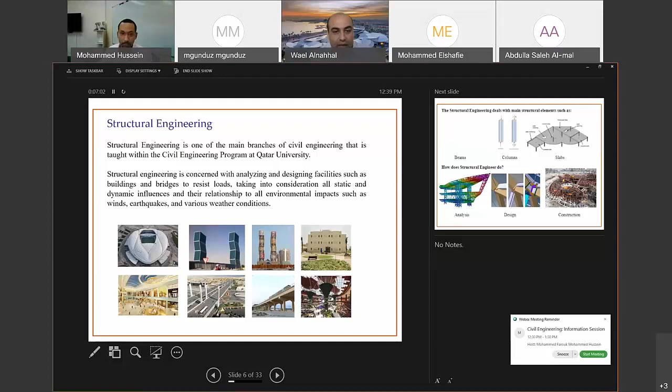So for structural engineers, you are going to deal mainly with different structural elements. We are talking about beams, columns, slabs, trusses. At the early stage, after graduation, you will mainly be responsible for the design of individual elements. After that, when you are a more experienced engineer, you will maybe be responsible for the structural design and the integrity of the whole system.

So what does a structural engineer do? We first do the design. In order to do a proper design, first of all, we need to do a proper analysis. And then after completing the design, the next stage is to make sure that our design will be constructed in a proper way.

If we talk about the major employers for structural engineers, and you look around you here in Qatar, you will find many opportunities for structural engineers. We're talking about engineering consultancies, local authorities like Ashghal, the oil and gas companies, the Ministry of Municipality and Environment, Qatar Rail, and engineering contractors as well. When you gain experience, you even have the opportunity to start your own company.

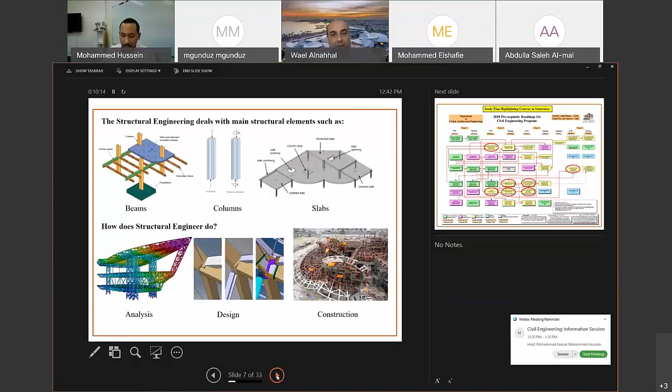As a structural engineer, you can work on site, or you can work in an office as a consultant. You can do the drawings themselves. You can be responsible for checking the drawings. You can make sure on site that all the structural drawings are implemented in an efficient way. So there are really many opportunities for you as a structural engineer.

Dr. Muhammad, next slide, please.

Okay, so as I mentioned before, in our study plan you will find about 5 to 6 courses related to structural engineering. We start with engineering statics to learn the fundamentals of equilibrium, types of forces, and how to deal with forces in 2D and 3D. After having the fundamentals, we move to strength of materials and how to do the proper analysis for structures.

The next stage is how to do a proper design. Here in our Department of Civil Engineering, we are talking mainly about steel structures and concrete structures. But if you need to design other types of structures, it's the same concept. So you will be equipped to do the design regardless of the material you use. Of course, I have to emphasize that we also have 2 elective courses you can pick related to structural engineering.

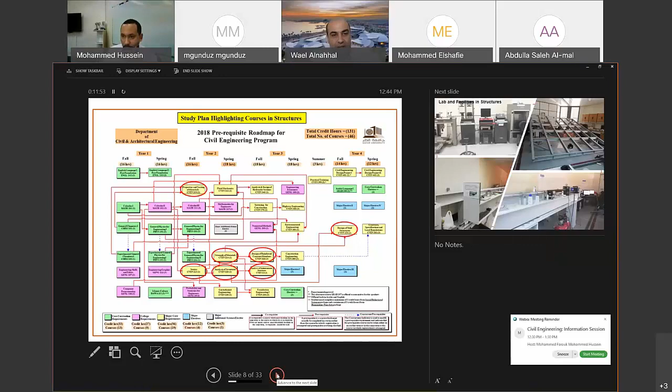Next slide, please. We have at the Department of Civil Engineering the facilities to run different tests related to structural engineering on both the undergraduate and graduate levels. At the undergraduate level, we have our structural lab where we can do different mechanical testing for concrete and steel, related to tensile capacity and compression capacity. At the graduate level, if you look at the pictures on this slide, there are many structural engineering projects we are working on right now with students in their master's and PhD programs.

And I believe we also have a structural lab in the engineering workshop where we can test beams and slabs as well.

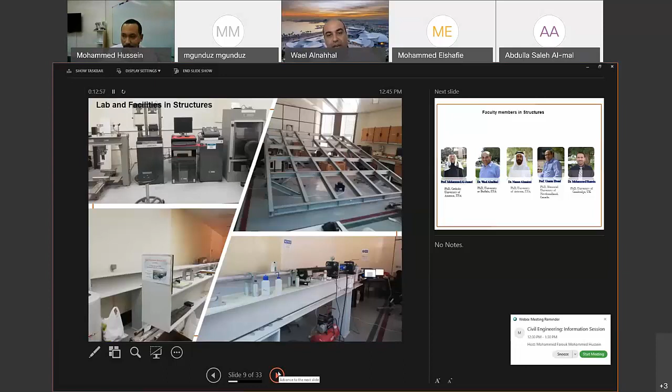I want to emphasize one more thing before ending my presentation. For us as structural engineers, it's really very interesting that you can see your ideas become reality. To be honest with you, from my experience, there's nothing quite like seeing a project that you designed or worked on at the site become part of the world around you.

And this project will stay for sometimes like 50 years. For example, imagine yourself working on the Qatar Rail project. This project will stay for 100 years, and I'm pretty sure you're going to be proud that you are part of such a project. So always think about that.

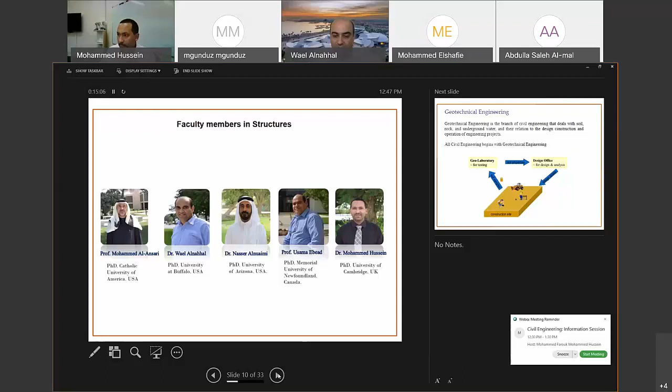Assalamu alaikum. My name is Mohammed Elshafie. I'm a geotechnical engineer. I'm also an associate professor here at the Department of Civil and Architectural Engineering. There has never been a more exciting time than being a civil engineer. If you're in any doubt, just look around you here in Doha. It's like a huge construction site, huge amount of activity everywhere. Equally, there has never been a more exciting time than being a geotechnical engineer.

Now, geotechnical engineering is the part of engineering that deals with the ground. Any structure that is going to be built anywhere in the world eventually needs to have its foundations on the ground or in the ground, and this is what we try to understand through geotechnical engineering. So what do we do? We take samples from the ground, test these samples in the lab, we try to understand them very well, and then we can do some calculations to make sure that whatever we want to build can stand up and stay there for many, many years.

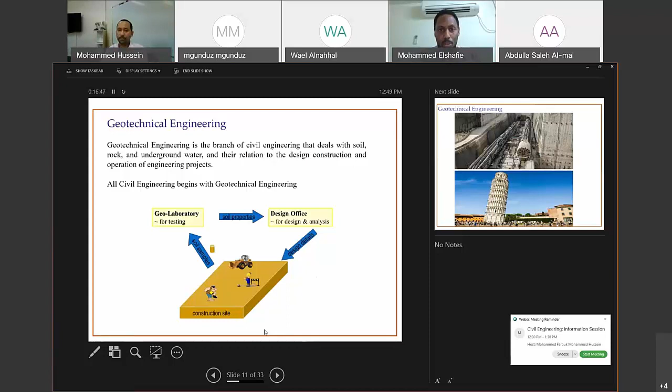In a way, we are like doctors. When doctors want to check the human body, what do they do? They have small syringes, they take some blood from you, they go and test that blood, and they come and tell you stories about what is happening inside. This is exactly what we do, but we do it with the soil, with the ground.

Next slide. Now, once you've understood what you are dealing with in terms of the ground underneath your feet, you can do all sorts of exciting structures. You can see the picture at the top. This is part of the Doha Metro, part of Qatar Rail. What you are seeing is a huge machine, like a small mole that goes into the ground and digs that hole so that the tunnels can then run through it.

The picture underneath is the Leaning Tower of Pisa. If it wasn't for geotechnical engineers, monuments like this would not be able to stand up for many, many years. It was about to fall. By understanding the ground underneath that structure, geotechnical engineers eventually managed to stop it from moving and save it so that everyone can enjoy it for many years to come. Go to the next slide.

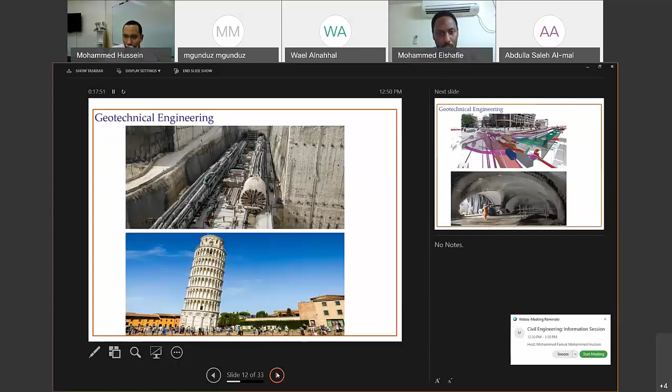Doha has just started putting in metro tunnels under the ground. It's only going to continue. Once you start digging into the ground, it is never going to stop, because more and more people come and live in cities. The population expands. They want to travel more. There is no space above the ground, so the only solution is to go under the ground. And it can get very congested very quickly.

The picture that you see at the top is a computer model from London. If you look underneath your feet, it can get really complicated. But as geotechnical engineers, we have all the technology to deal with that. We make sure that these do not clash with each other. It's all very high tech. You actually simulate all that in a computer.

Once you've done all the simulations and calculations, you can translate that into the picture that you see underneath. What you see is someone with a small joystick, just like what you use for your PlayStation, controlling the concrete and how it is spread onto the soil so that you can create these beautiful cavities for tunnels eventually to run through. So if you decide to become a civil engineer, and within civil engineering to study geotechnical engineering, you will have the ability to do all of this. Next slide.

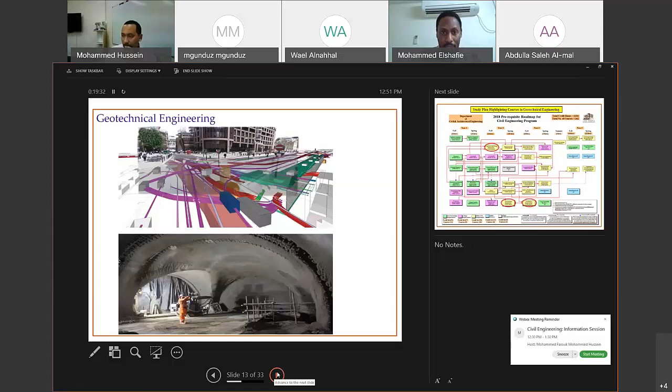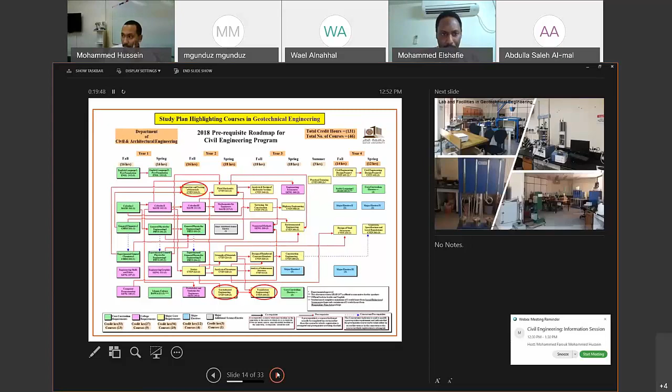There are a number of classes that you can take within the study plan that you can see in front of you. These are spread over the years to give you the right amount of information at the right time. If you go to the next slide, we also have a number of lab facilities. This is when you take all the samples, you bring them to the lab, and then you study them in great detail. Next slide.

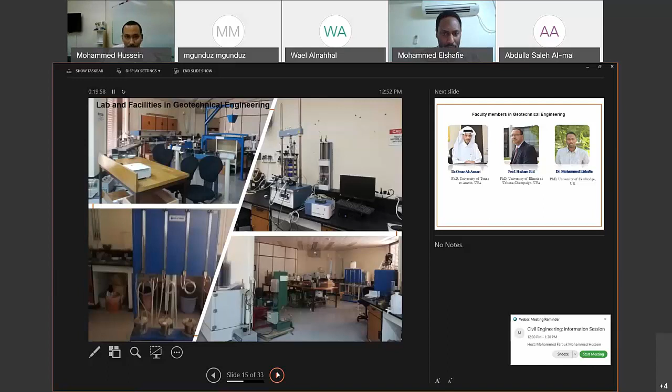So we've got 3 members of staff, part of the geotechnical engineering group within the civil engineering department. We've got Dr. Omar Al-Ansari, Professor Hisham Eid, and myself. We will be very excited to have you on board. And if you like what you've just seen about digging tunnels and putting foundations into the ground, you're definitely in the right place. So I wish you best of luck for the rest of the semester.

Okay, thank you very much, Dr. Elshafie. Our next part is going to be presented by Dr. Alaa Al-Hawari from Environmental Engineering. So my name is Alaa Al-Hawari. I'm an associate professor at the Department of Civil and Architectural Engineering. I teach courses related to environmental engineering. I need you to know that environmental engineering is one of the branches in civil engineering that is taught within the civil engineering program at Qatar University.

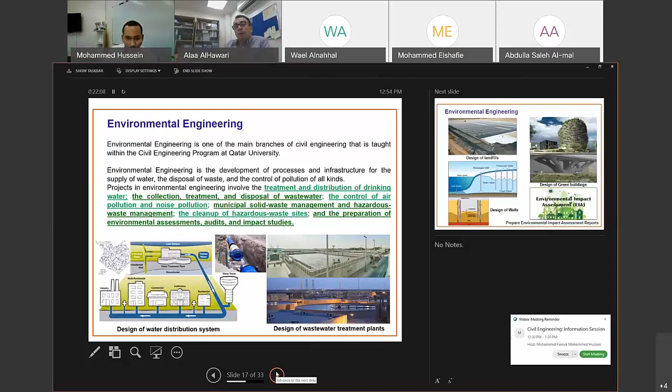As an environmental engineer and as a civil engineer, you will deal with different projects related to treatment and distribution of drinking water. So you will learn and you will be able to design water networks, sewer networks. You will be able to design treatment plants, wastewater treatment plants. You will learn also about the design of municipal solid waste management and hazardous waste management. So all these topics are covered for an environmental engineer in the civil engineering program.

In the next slide, also, it shows you the different possibilities of what an environmental engineer does. As I mentioned, design of landfills, design of wells, whether wells as water resources or wells that are used in construction for dewatering of a construction site. Also, the design of green buildings, and by green buildings, I mean buildings that are environmentally friendly. We have a lot of these buildings all over Doha.

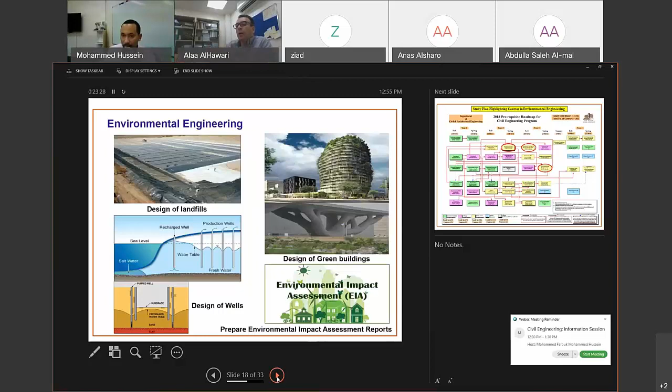And one of the important issues in environmental engineering is to be able to prepare environmental impact assessment reports. Every project that is done in Doha or all over the world has to do an environmental impact assessment study, which is usually done by environmental engineers, civil engineers, mechanical engineers, electrical engineers. It's a combination of work between all these engineering disciplines. So you have to prepare this report in order to get the okays to go ahead and proceed with the different projects.

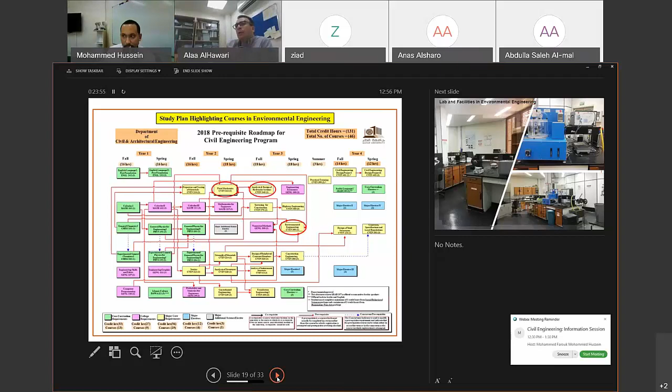In environmental engineering, you will take several courses related to water and environmental engineering. It starts with fluid mechanics. After fluid mechanics, you will take the hydraulics course. And we have a core course, which is Introduction to Environmental Engineering, plus selected courses. I think we have 2 selected courses you can take in the civil engineering program. We have the environmental engineering lab with different equipment. The lab is used for the undergraduate and graduate studies. The faculty members involved in environmental engineering are Professor Riyad Al-Raoush, myself, Alaa Al-Hawari, and we have Dr. Arsalan Ayyari. Thank you.

Thank you, Dr. Alaa. Next, we have Dr. Murat to talk about construction engineering and management. This is Dr. Murat from the Construction Engineering and Management Division, and I hope all the best for our students and all the faculty members. So I'm going to explain to you briefly what we do in construction engineering and management.

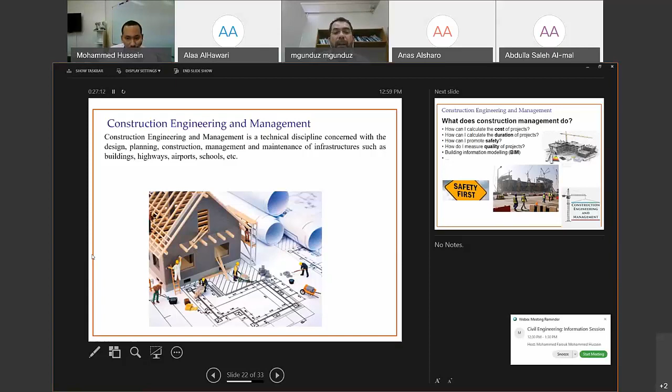For any project we are doing, whether it's underground, ground, in the sea, we have to manage those projects. What I mean by managing those projects is we have to see how many people are needed, how about a site layout, how we are going to move our facilities around the site, how we are going to maintain their safety, how we are going to make sure that the construction facility is to the standards we are looking for, and things like this.

If you go to the next slide, I'm going to show you some brief things we do in construction management. So whatever our project is, and whether we are the owner or the contractor or the consultant, we need to know the cost of the project because every agency has a budget and everybody is trying to get their benefit from this cost. So if you are a contractor, you must know how much you are spending.

If you are a government agency, you want to know how much of your annual budget will go to the construction sector. At the same time, duration is very critical. Why? Because, for example, now in Qatar, we are getting ready for the 2022 World Cup, and we want to finish the projects on time by 2022. So we want to know how long each stadium is going to take, highways, hotel construction, and other facilities we are doing. And all these calculations are done by the construction managers, by us, by civil engineers.

And we teach you how to calculate the total cost for any structure, any facility. We teach you how to calculate the duration of any construction project. Not only these two, we also teach you many aspects of management skills, like how to work in a multi-team environment, because in construction we have architects, mechanical engineers, electrical engineers, and most of the time the project manager will be a civil engineer, and we have to manage all these teams together in the same environment.

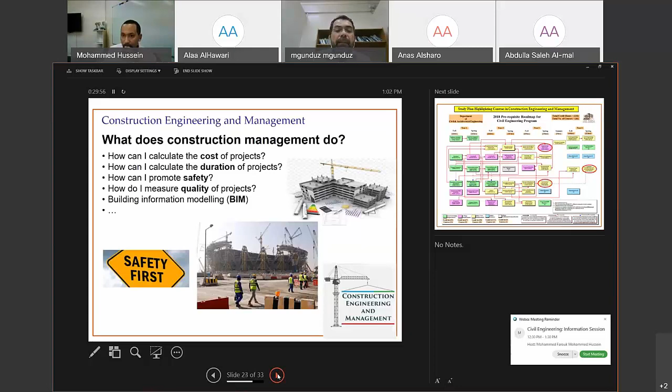So in our courses, we teach two undergraduate courses. One is related to construction engineering and management, and the other is the contracts course. So we teach you the analytical skills to calculate and give you background about construction. At the same time, we teach you how to prepare contracts, how to get ready for bidding, how to prepare a bidding package, and how to calculate all these things in one package. We also have some elective courses about scheduling to get you prepared for real life by teaching you the most popular software like Primavera, so that you can include this in your CV.

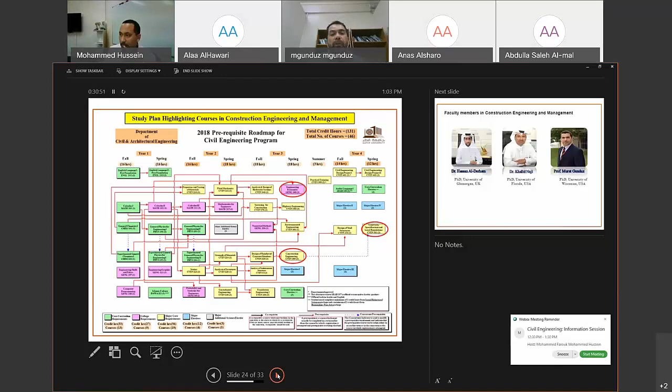If you go to the next slide, I can show you our faculty members. The president is in the construction engineering and management area, the dean of engineering is in the construction engineering and management area, and myself as a faculty member in this area. So I would like to congratulate all of you for being in Qatar University, and we will be very happy to see you in the civil engineering program and in the construction management program to teach you all these aspects.

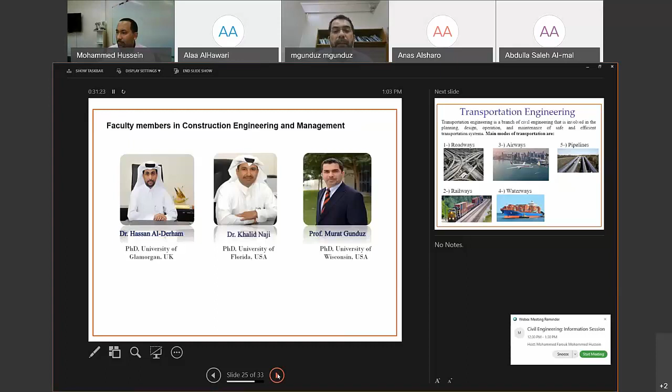I'm Dr. Okan Sirin, specializing specifically in pavement materials. Today I will be talking about transportation engineering for the students who hopefully will join us in the future. Transportation engineering is a branch of civil engineering that's involved in the planning, design, operation, and maintenance of safe and efficient transportation systems. We have 5 modes of transportation. Number 1 is roadways. Number 2 is railways. Number 3 is airways. Number 4 is waterways. And the 5th one is pipelines.

All are related to transportation engineering, and civil engineers deal with all modes of transportation. For instance, we design the roads. We build the roads as civil engineers, with either concrete or asphalt pavement. We deal with the railways. You can do the geometric design of railways or get involved in the construction of railways. You can work as an air traffic controller in airports as civil engineers. You can work in waterways for logistics or in pipeline construction.

What I mean by pipeline construction is moving liquid natural gas, petroleum, or water supplies, any kind of materials that can be carried with pipelines, and these are basically in the work of civil engineering. Next, please.

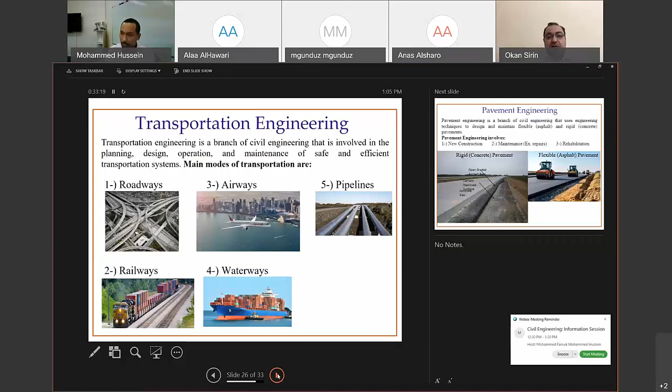Pavement engineering is a part of transportation engineering that uses techniques to design and maintain flexible, which is asphalt, and rigid concrete pavements. It involves new construction, maintenance, repairs, or rehabilitation.

In these two pictures, you can see two different pavement types. The one on the left is called rigid pavement, and the one on the right is called flexible pavement. The difference is the material that's used. On the left, we start from the subgrade, then the sub-base, then the base material, and then on the top concrete,

which is Portland cement concrete. Or sometimes you see black materials on the roads, as on the right side, which is called asphalt concrete. That's called a flexible pavement. All these types of construction are within the work of the civil engineering discipline. Next, please.

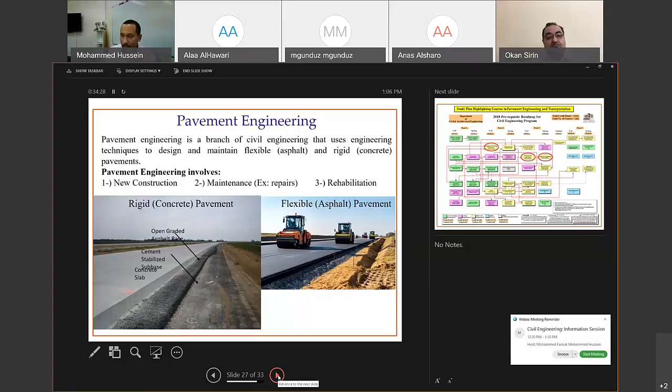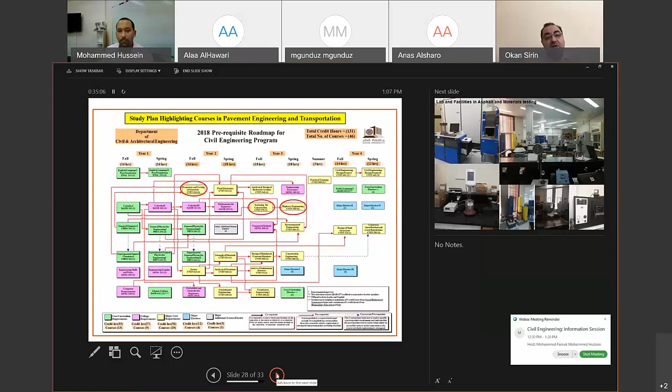If you start studying in the civil engineering program, there are some courses related to transportation engineering that you have to take. One of them is properties and testing of materials, which you will take in the second year. You will also take a surveying for construction course in the second year. In the third year, there is a course called highway engineering. These are compulsory courses, but we also have elective courses related to railways, traffic, and pavements, which are optional for our students. Next.

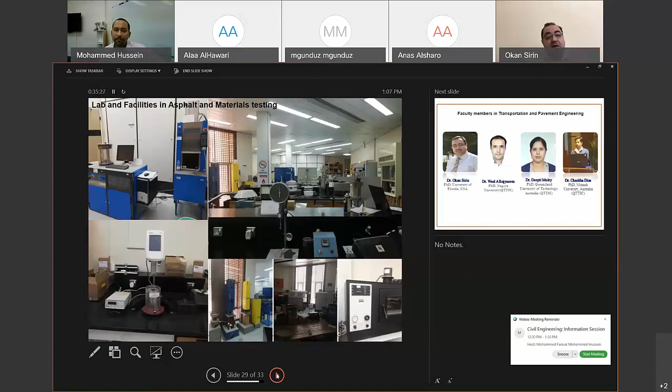We have a very good lab facility in our department, which covers materials and asphalt, and is equipped with very modern equipment. If you take some courses in civil engineering, you will be using these labs to have hands-on experience. Next.

The faculty members in the transportation area and pavement engineering are myself, Dr. Wael Alhajyaseen, Dr. Deepti Muley, and Dr. Charitha Dias. They will be supporting our department and working with us. So this is basically it about transportation engineering.

Thank you. What I would like to add to what my colleagues presented regarding the different components of civil engineering is that students throughout the civil engineering program study all these components. Generally speaking, the civil engineer would know about all these components and would be qualified upon graduation to continue his career dealing with a number of these components or all of them.

Just giving the audience more information about the Civil and Architectural Engineering department. We've seen the faculty staff. Regarding teaching assistants, we have 6 teaching assistants and 1 lecturer. We have 2 lab technicians, so we have very strong personnel in the Department of Civil and Architectural Engineering, and we benefit from admin support staff.

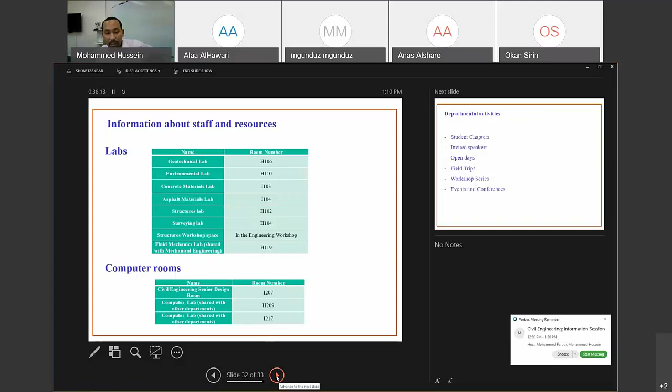Besides this, as my colleagues went through, we have a range of lab and equipment facilities, and we have access to computer rooms. You see in front of you the lecture rooms and labs available for the civil engineering program. Inshallah, we will be moving to the new building, with a new facility and new equipment. Part of the civil engineering program includes a component on use of software, so part of the facilities are computer rooms.

Just talking quickly about departmental activities. It's not just activities within classrooms, lectures, and labs. We have other venues for student involvement. Students can get involved through student chapters; we have strong interaction with top civil engineering institutions like the American Society of Civil Engineers, the Institution of Civil Engineers, the American Concrete Institute, and other major institutions. Those institutes are represented by groups of students who form student chapters within the department to do activities and enrich student life within civil engineering.

We also invite speakers from time to time. We have open days, field trips, workshop series, lots of events, and from time to time we organize conferences. I believe that's all. We just wanted to give you some information about the civil engineering program and the Department of Civil and Architectural Engineering.